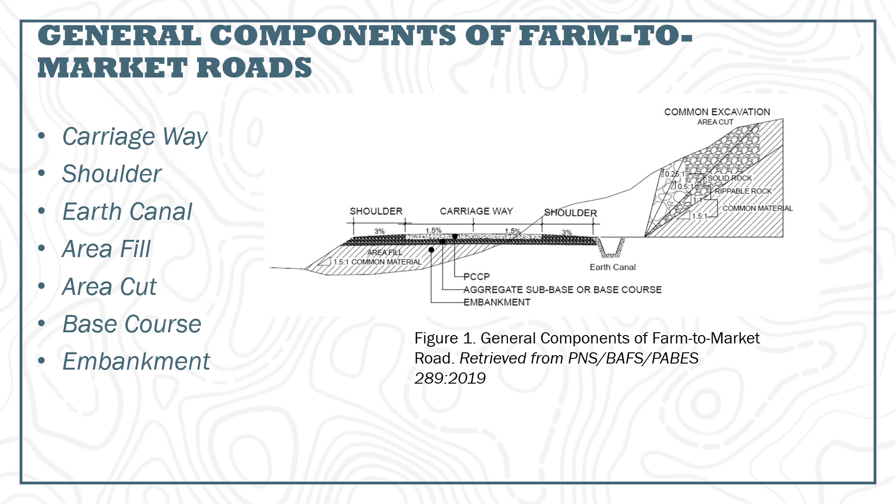So, here are the components of farm to market roads. So, first is the carriageway. It is a portion of road intended for the movement of vehicles, exclusive of shoulders. So, a carriageway provides smooth, stable, and durable surface for the transportation of agricultural products from farm to market, facilitating efficient and safe travel for both light and heavy vehicles.

So the shoulder is a portion of the roadway contiguous with the traveled way for accommodation of stopped vehicles for emergency use and for lateral support of base and surface courses. It refers to the portion of the road adjacent to the main driving lanes. It's typically an unpaved strip of land that provides additional space for vehicles to pull over, enhancing safety.

So the earth canal delivers the runoff water away from the road. So earth canal can be irrigation, drainage, and roadside drainage canal. These canals are typically unlined and rely on the natural soil for their structure. So, regular maintenance must be provided for it.

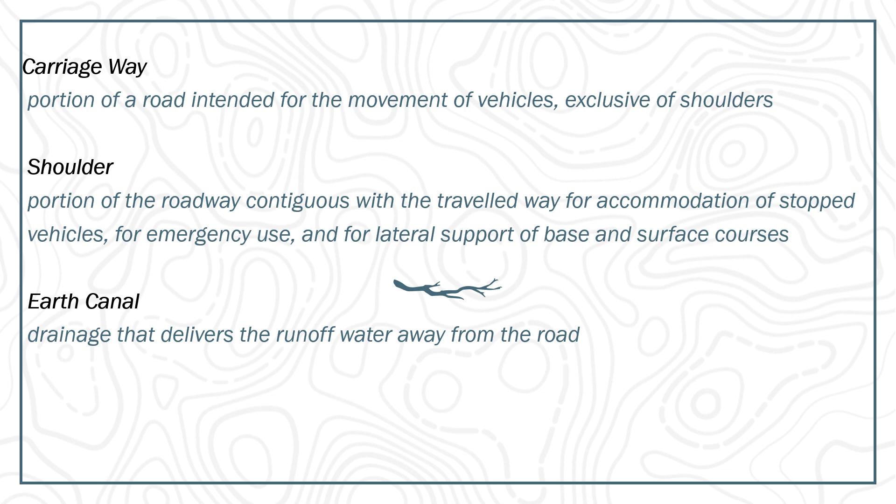And next is the area fill. This is a component that is filled in the area that has lower elevation with respect to the road elevation. And lastly, the area cut. This is a component that is excavated from the area that has higher elevation with respect to the road elevation.

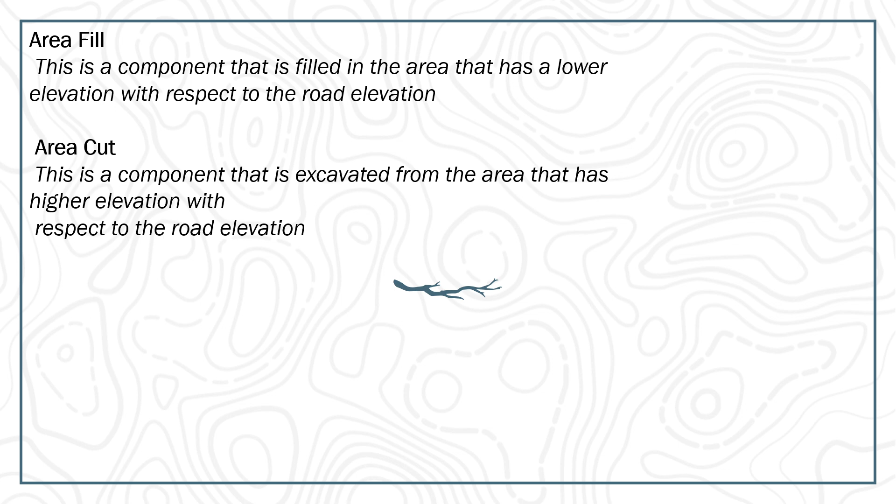Then base course. This clause shall consist of furnishing, placing, and compacting an aggregate sub-base course on prepared subgrade in accordance with this standard and the lines, grades, and cross-sections shown in the plans or as directed by the engineer.

Embankment. It usually consists of earth or stone to raise the ground or formation level above the natural surface. So this refers to a raised structure made of soil, rock, or other materials that is constructed to elevate road. So this elevation serves purposes like drainage, stability, flood protection, and grade adjustment.

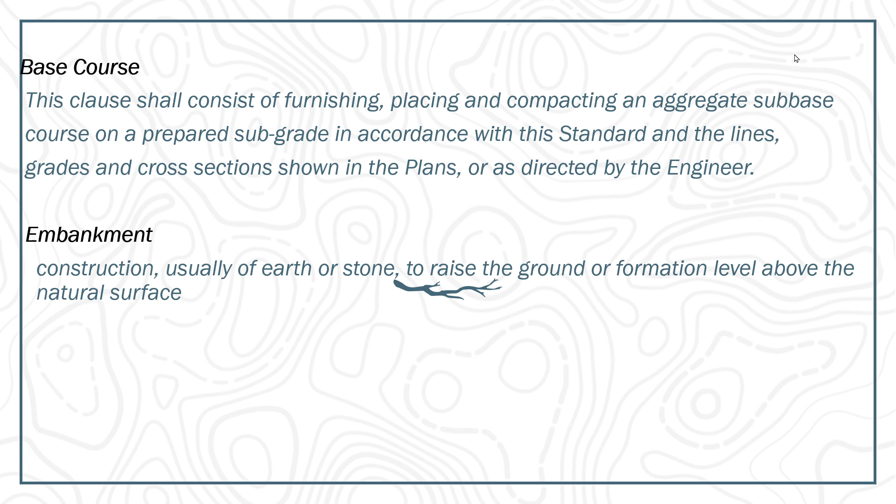So here are the design considerations for the farm to market roads. The geometric design. Its features should be provided consistent with the projected usage and environmental conditions of the terrain. The roadbed should be widened especially along sharp curves. A one-lane roadway shall be constructed in places where only light vehicles can pass.

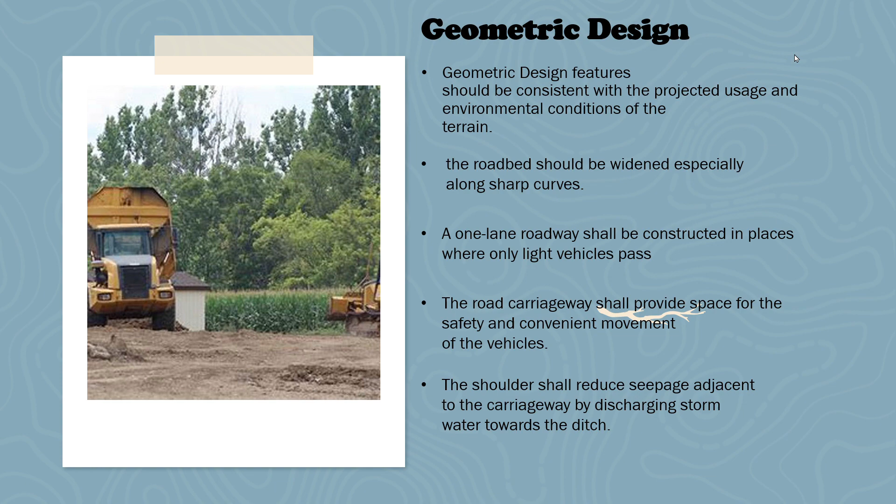The road carriageway shall provide space for the safety and movement of the vehicles. And lastly, the shoulder shall reduce seepage adjacent to the carriageway by discharging storm water towards the ditch.

Pavement design. The minimum pavement width shall be 2.5 meters for one lane and 5 meters for two lanes. So for the thickness, it shall be 200 millimeters, and the slab length shall be 4.5 meters, and the ratio of slab width to length should not exceed 1.25.

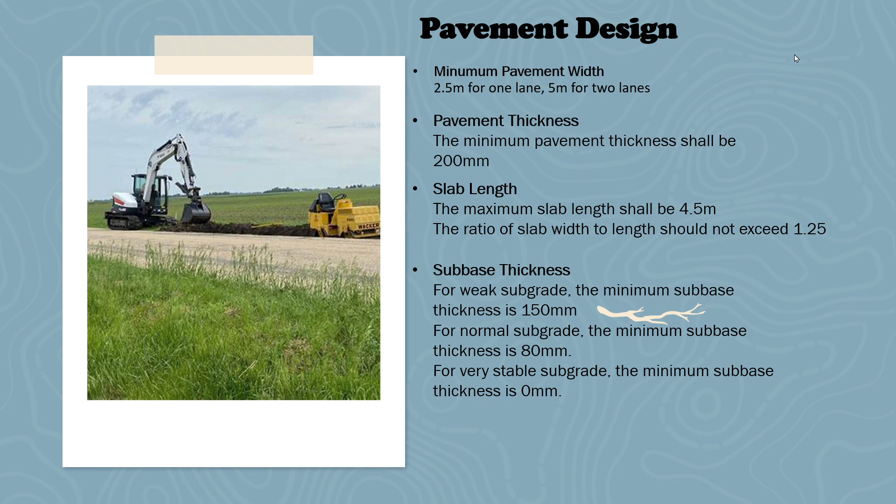So next is the drainage design. Drainage should be located parallel to... the drainage shall be discharged into the natural or man-made drainage features capable of conveying flow in a safe, efficient manner.

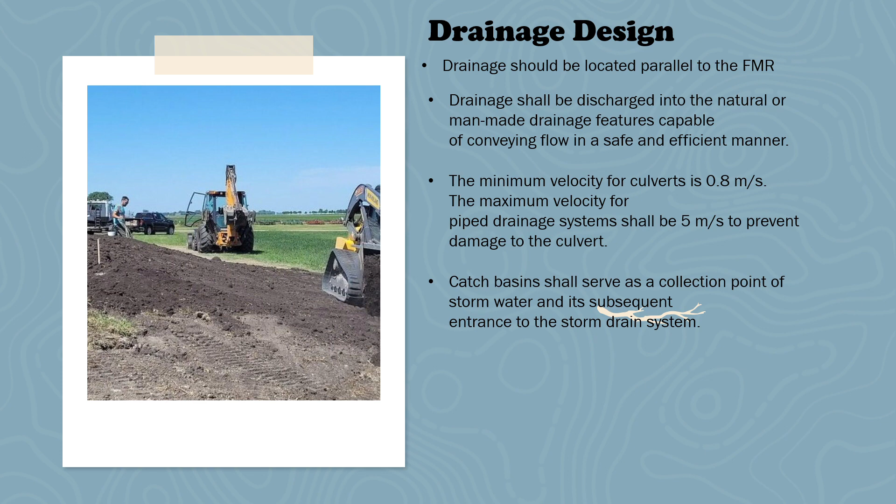And the velocity for culverts, 0.8 meters per second, and the maximum velocity for pipe drainage systems shall be 5 meters per second to prevent damage to the culvert. Catch basins shall serve as a collection point of stormwater and its subsequent entrance to the storm drain system.

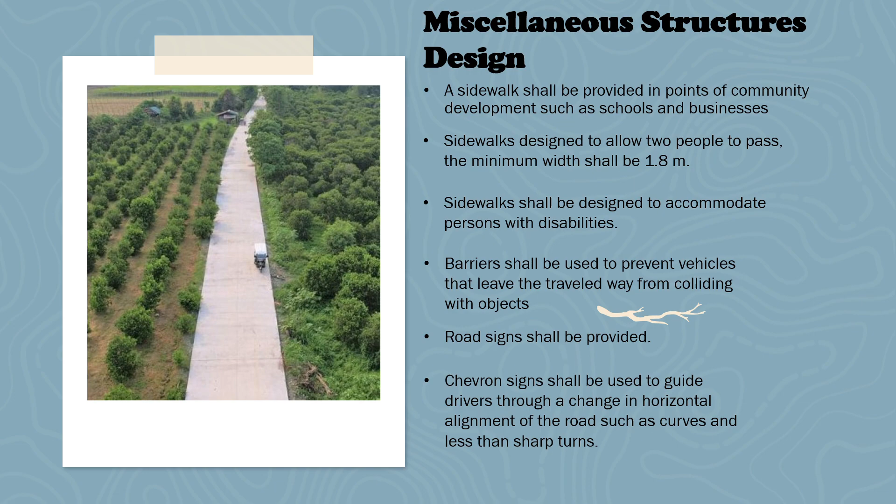So the reference of this video is the PNS, BAFS, and PAES 289 of 2019.